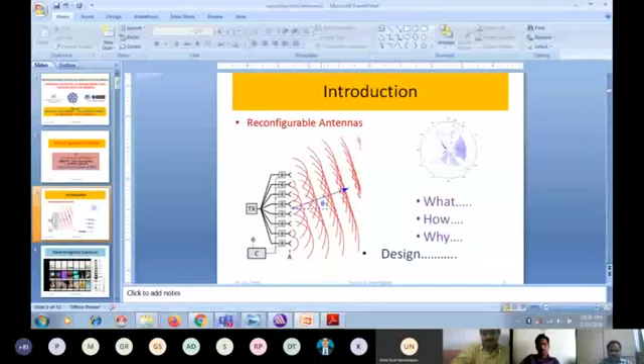Right? Let me start with the design of reconfigurable antennas. First of all, let me start with the electromagnetic spectrum. I'll take a few minutes on the basics so that it will be useful and we'll go in a different point of view. Now, as we know, the EM spectrum is the range of frequencies or spectrum of electromagnetic radiation along with their respective wavelengths.

Now here, to prevent the interference between the different users, the generation and transmission of radio waves is strictly regulated by national laws and coordinated by the international body, that is the International Telecommunication Union (ITU).

They have been assigning different frequencies for different vertical services. Nearly 40 radio services are defined by the ITU. In some cases, the spectrum is sold or licensed to operators of private radio operators, cell phones, broadcast televisions, etc. Because it is a fixed resource in demand by an increasing number of users, the spectrum became so congested and needs to be utilized more effectively.

That is what we deal with in the new technologies as well as in driving modern telecommunications. So innovations such as spectrum management, frequency pooling, and of course cognitive radio are the new technologies being utilized to use the electromagnetic spectrum very effectively. So we should effectively make use of the spectrum.

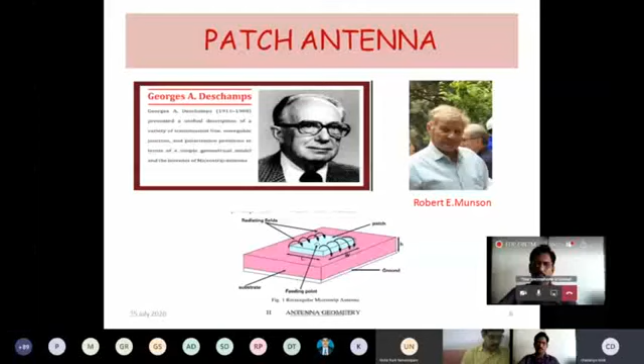Now, for Wi-Fi, the data rate may be up to 54 Mbps, and the distance covered by Wi-Fi is only up to 30 meters. Similarly, we have Zigbee, which works only up to lesser distances. Even Bluetooth works only up to 10 meters, with a data rate of only up to 1 Mbps. So these different wireless standards work with different data rates, ranges, and bandwidths.

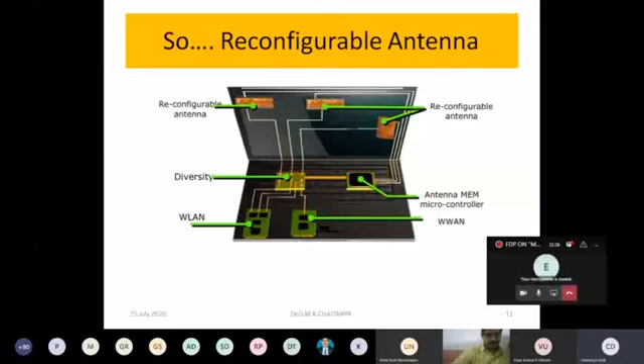Therefore, in order to support these different technologies and increase the functionality, we need a single antenna, that is a reconfigurable antenna. Now, what is meant by a reconfigurable antenna?

A reconfigurable antenna has the ability to radiate more than one pattern at different frequencies and polarizations. It can provide diversity features of operating resonant frequency, polarization, as well as radiation pattern, without changing the physical structure. How can we achieve this reconfigurability? Only by changing the current distribution over the structure.

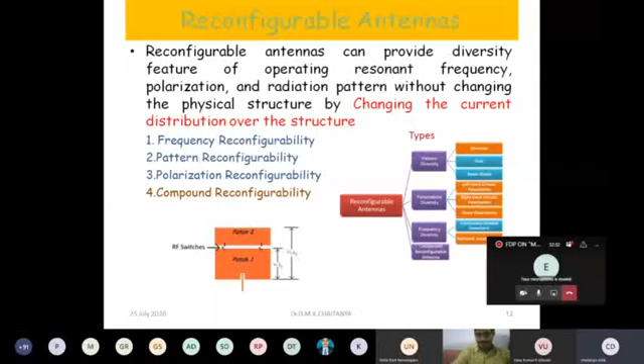Now, what are the different types of reconfigurable antennas that we have? We have different types of reconfigurability: frequency reconfigurability, pattern reconfigurability, and polarization reconfigurability.

Of course, the combination of these three is termed compound reconfigurability. Now what we are going to do is, we are not changing the vertical physical structure. By using some different switching techniques, or different types of vertical techniques, we are going to achieve reconfigurability here.

Now you can see here, suppose the antenna is working at different frequencies, so I just can use only one antenna rather than using different antennas for different frequencies. Similarly, using these antennas, I'll have only one antenna to radiate differently, or in different directions. Similarly, the polarization reconfigurability, whether I need circular or linear polarization.

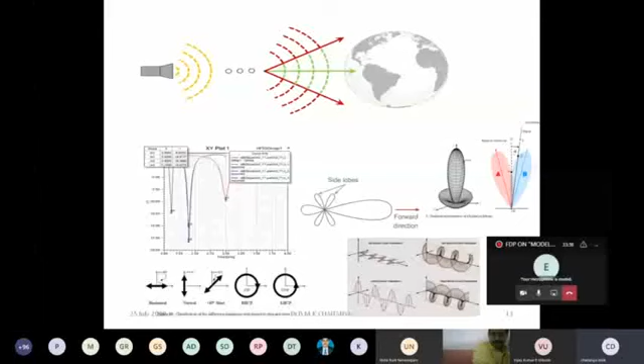Now, why these vertical reconfigurable antennas? This reconfigurable antenna can reduce the size, the volume, as well as the cost of the vertical system. Similarly, they support multifunctionality, and require a lower end front-end processing, which reduces the interference. That is very important.

Even yesterday the experts gave the MIMO techniques and everything, which reduces the interference, which is useful for adaptive environments like cognitive radio, etc.

Now, how to achieve the reconfigurability? It can be achieved by many ways: either by using electrical switching, or optical switching, or by changing the physical orientation of the antenna, or by material change.

Now what I am going to do is, this is a fixed antenna structure. I am not going to change the structure, I am designing the structure like that. So I may use an electrical switch or optical switch, so that depending on the switching characteristics, the antenna length will vary. In turn the current distribution will vary, therefore the antenna will radiate differently with different resonant frequencies.

So here, either I may use the vertical switching technique like electrical switching or optical switching, or physically change it. I may use a rotor or stepper motor here, so that I can change the orientation, and therefore also achieve reconfigurability. Similarly, by using different material changes.

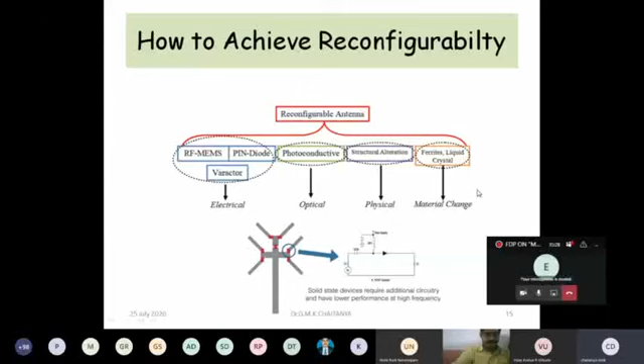So all the design and everything we will see here. Now, what are all the design considerations of the reconfigurable antenna? First of all, the first one is the frequency, similarly the radiation pattern as well as the polarization.

Now I just want to tell a small thing for young researchers here. The first most important factor to be considered for research is the frequency — where it should be used, either for narrow band or wide band. Then we have to take these frequencies as per the guidelines of ITU, because most people select frequencies as they require or something.

So it should be as per the ITU vertical regulations. Suppose you want to develop applications pertaining to industrial, scientific and medical use, you have to select the ISM band applications at 2.45 gigahertz or something. Better we go for UWB because it is open for all, that is 3.1 to 10.6 gigahertz.

Similarly, the application — what for we are using these antennas. Is it for mobile applications or fixed applications or platforms? And what is the volume area available to place the antenna, and the bandwidth consideration.

Similarly, the radiation pattern, and in what direction I should transmit the signal, and what beam width I require. Similarly, whether it is for long distance communication or short distance communication — what beam width I require.

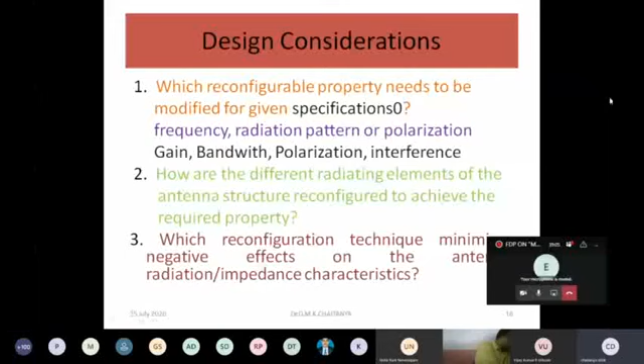So we have to carefully design in order to place these switching elements inside the antenna. The general switching elements we may come across in the design of reconfigurable antennas include RF MEMS, which uses mechanical movement in turn changed by electrostatic, magnetostatic, or piezoelectric effects. Switching means always on and off, so how do we achieve the on and off condition? RF MEMS can be switched by using electrostatic, magnetostatic, or piezoelectric effects.

Similarly, pin diodes, in the forward biased condition, are in the on condition, and in the reverse biased condition they are in the off condition. Varactor diodes are similar to the PN junction diode, with a variable capacitance achieved through biasing. By applying a suitable biasing voltage, we change the capacitance, which switches them on or off. Similarly, photoconductive elements like lasers and LEDs can be brought into the off or on condition, achieved by using external lighting from laser diodes.

Whatever switching element we use inside the antenna, we can switch it on and off so that we may increase or decrease the length of the antenna.

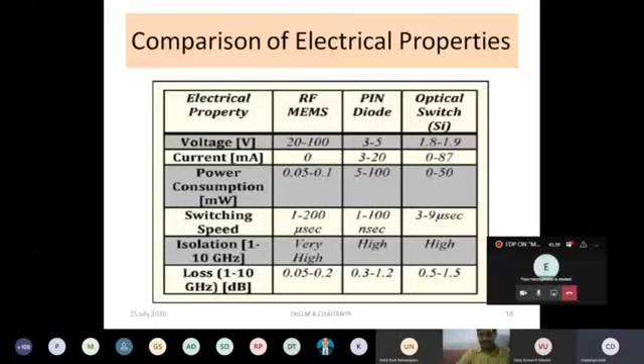But we have to select the switching elements as per our design requirements only.

Now what are the design challenges when designing a reconfigurable antenna? First, the biasing circuitry - if the biasing circuit or biasing network is complex, it makes the antenna complex. We use biasing circuitry in order to run these switches, to make them turn on and off. This is given by the vendors, or we may select from anywhere. This is very important because it increases the complexity of the antenna. Similarly, increased power consumption will increase the system cost. There is also the generation of intermodulation products, which may result in increased interference. Similarly, switching speed is important to ensure the proper functionality of the antenna.

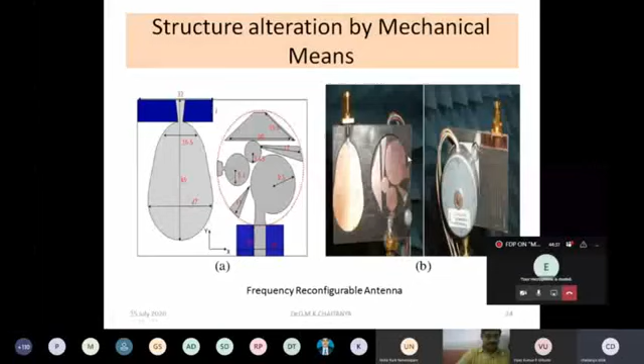Behind this structure, they have placed one stepper motor. Now what happens is whenever the stepper motor rotates, the orientation of these antenna elements changes so that it resonates at different frequencies.

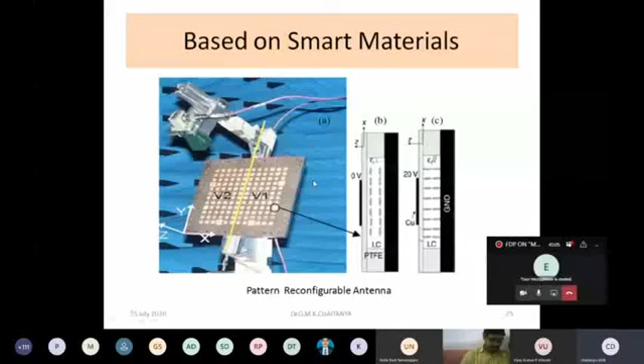Similarly, based on smart materials. Here also in this design, physically we are not changing the materials. By applying suitable biasing voltages to liquid crystals or ferrite devices, we are going to change the material properties. In turn, we are going to achieve the reconfigurability.

Now, scope for the research. Extending the designs of reconfigurable antennas, engineers can look into aspects like frequency of operation for different upcoming applications, maybe millimetric waves up to 200 to 300 gigahertz. Similarly, effective utilization of the spectrum by increasing the frequency of operation, while keeping the transmitted power levels within the safer zones, bandwidth and gain, polarization effectiveness, which in turn increases the speed of operation with increased data rates.

Similarly, the coverage area. For example, if we are designing 5G antenna transmitters, what is the coverage area? Up to what area can I cover? All these are very, very important. Similarly, interference mitigation techniques by using MIMO. MIMO is the best concept for interference mitigation.

Similarly, attenuation of the signals. Everyone experiences attenuation of the signals during heavy rain. You may not get your signals in your TVs during the rains. All these are different research areas where you can work. Usage in IoT platforms, by using virtual antennas, maybe in malls, where we may have different gadgets and devices. So people may work on these things.

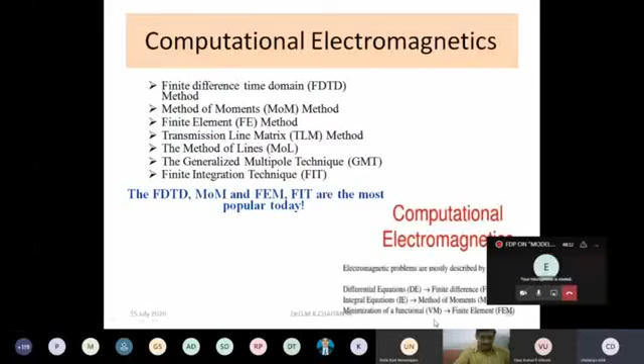Suppose we are using the FDTD method; it solves Maxwell's equations in differential form. Similarly, when we solve the integral form of the equations, the method of moments is implemented. Similarly, the FEM technique basically uses energy minimization as a function. Of course, they have their own advantages and disadvantages.

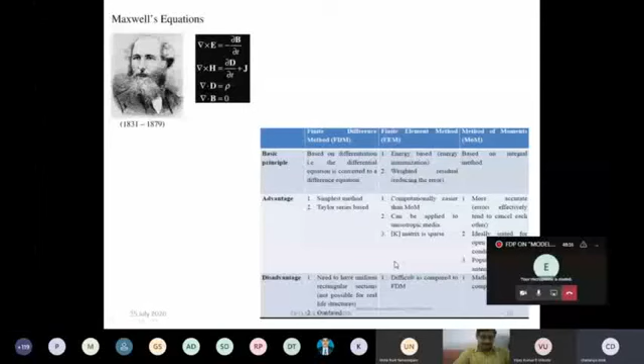Now, I'll give a small point on how the finite element method works, because HFSS is based on the finite element method. The finite element method basically solves the design in four steps. First is the discretization of the antenna elements into a number of subregions. Then deriving the equations of a particular element, assembling all these elements, and solving the equations obtained. ANSYS HFSS is based on this finite element numerical technique.

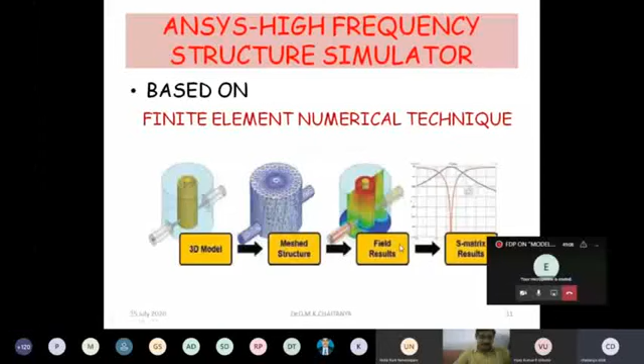It converts the structure into tetrahedral meshes and calculates the results based on the energy functions. Now, what are all the six steps that we have?

Basic design steps that everyone should remember: first of all, we have to create the model, then we have to assign the boundaries, then go for the excitation, then we have to set the analysis setup, then we have to analyze and solve, and after that we have to get the results.

Now I just want to show you one small design of a compound reconfigurable antenna using ANSYS HFSS. Here I'm using only HFSS version 15. Of course, you have the latest version 19, which is sophisticated with different solvers and different kinds of applications, but we are not permitted to use it. Here I am using only 15. So let me start with this particular design. Before going to this design, I just want to tell you two points.

Now, the dimensions of the antenna. Here you can see all the dimensions of the antenna. They are calculated using the normal patch design equations. Here we have to calculate the width as well as the length, which is L effective minus 2 delta L. Why minus 2 delta L? Because of the fringing effects, it may be extended by delta L in this direction. So we have to remove 2 delta L. Therefore we are calculating the length and width of the patch antenna.

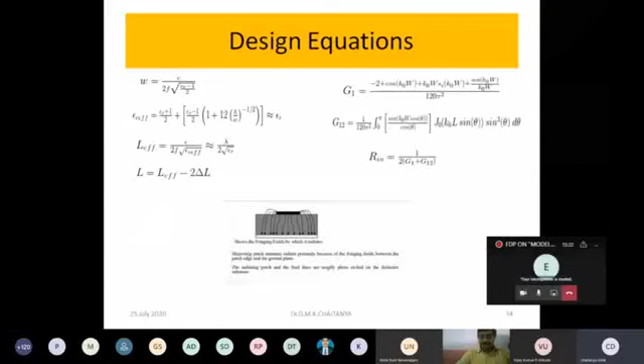So after that, I'm using an inset feed here. In order to design the inset feed, we have to calculate the impedance. After calculating the patch length, the feed line characteristics have to be calculated. So we have to find out the input impedance of the antenna. We have to calculate the edge impedance, because we have to properly interface the feed lines with the patch impedance. The current-voltage ratio changes as a cos square across the length, resulting in the impedance decreasing from the edge as a cosine function toward the center.

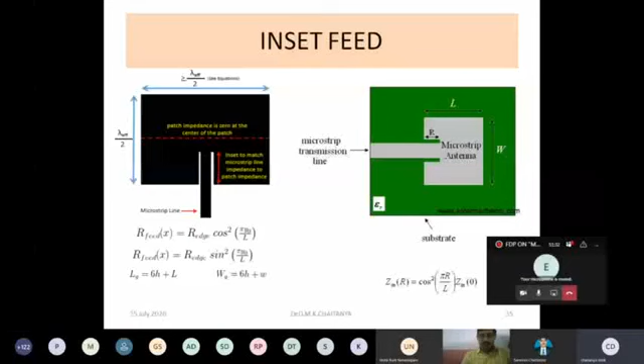So these are different feeding techniques. I'm not concentrating on the theory here. So this is an inset feed antenna. I'm designing these dimensions for 2.4 gigahertz, of course. Then I have optimized these to get the proper results. You have to keep that in mind. Now let me start with the design.

Sir, is it... I think it's visible now. Yes, yes, definitely. Yes, sir, now visible. Sorry participants for the small problem.

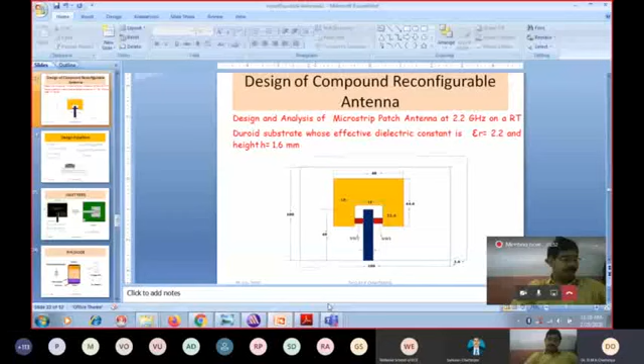Now I just want to show you. I want to design this compound reconfigurable antenna. It contains the patch antenna, which contains the substrate here. Then we have the microstrip patch. Then this is the feed. Now I am using two PIN diode elements here. We are going to see the compound reconfigurability. What is meant by compound reconfigurability? It gives frequency reconfigurability, pattern reconfigurability, as well as polarization reconfigurability. The antenna can achieve all these things. We just want to have a small demonstration here.

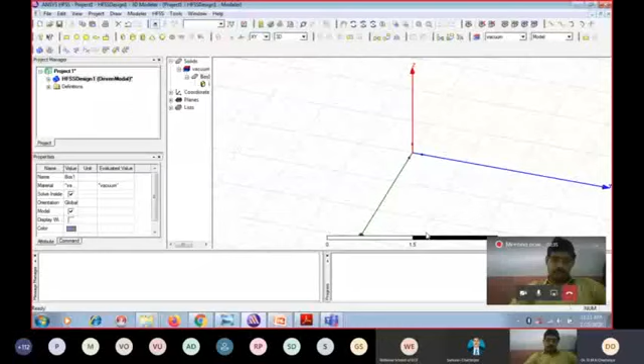Now we have to start with the substrate. I'm just drawing a substrate here. This is the position. I am taking it as minus 50, minus 50. Then the length here I am taking as 100, then this one 100, and the Z size is minus 1.6 here. Why have I taken this one? You have to press Control D here.

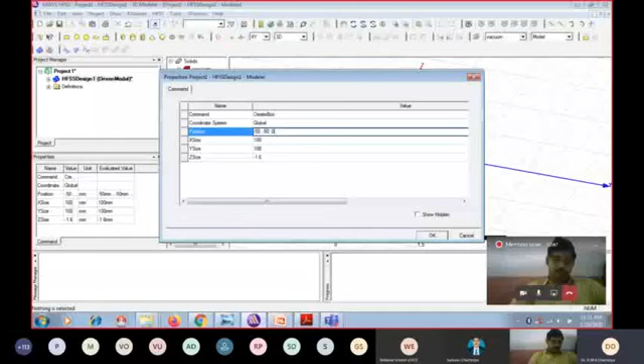Now, this is my ANSYS HFSS window. You can see we can create a project here and insert an HFSS design. Then immediately we get the project manager as well as a different window here. First of all, I'm designing this one. I'll give you a small introduction about this. Actually, it is designed with FEM. Before that, we have to go to the modeler. We have to change the units. The default units are already millimeters.

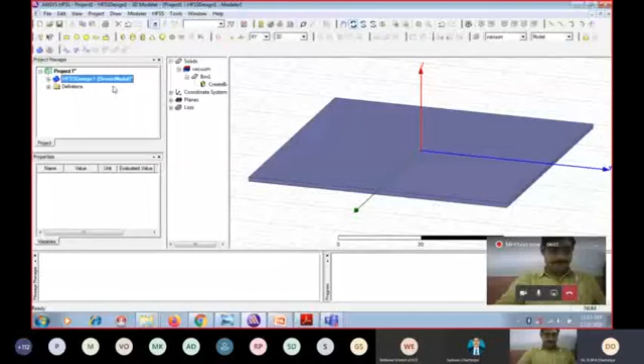Similarly, we have different modelers. You can go with the model or solution type. I'm going with driven modal; these are different concepts. We have different types of modeling techniques here. The modal is meant for TE or TM design, whereas for TEM, different waves, we have to use terminal.

Now I have designed the substrate here. Now I'm changing its name to substrate. For the material, as I've shown you, I'm using Rogers RT Duroid.

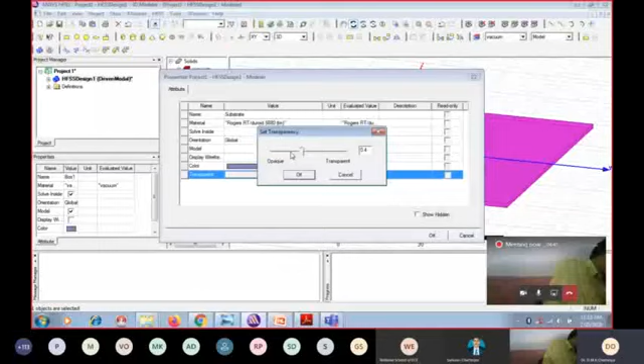You can see here 5880, whose relative permittivity is 2.2. This I am selecting here, then pressing enter. Now I am just making it a transparent color, whatever color I can use. So I am changing the color here. You can see here now. So this is our substrate. I have created the substrate.

Now, after the substrate, what we have to do is create the ground. There are 3 ways to design the ground. The simplest method that I am showing you is, you have to select this face by entering F, and after entering this one, I am just clicking it. Press F and click. Once again, I'll show you. Pressing F and selecting this one, you will get like this.

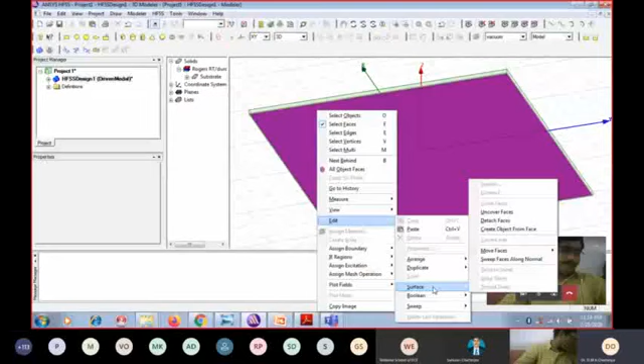Now what I am going to do is Edit, then Surface, then Create Object from Face. So we are creating the ground plane here, or otherwise we can draw a vertical rectangular shape also. But this is the simplest method. Now this region you can see is the substrate, of course, and here we have got the ground.

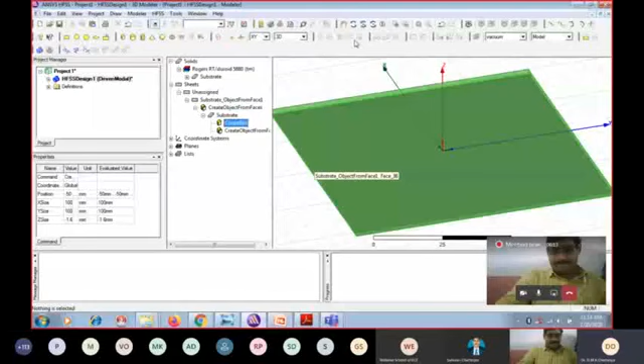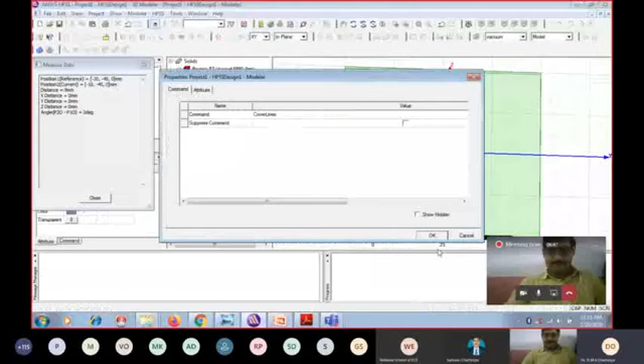So the first step is creating the substrate. The next step is creating the ground plane. Now we have to assign the boundaries; later we'll see it. Now I'll create the patch here. In order to create the patch, we have to select a rectangle. Now what are the dimensions of this rectangle? This is the patch.

So I am taking it from -20, -22.3 here, 40 here, 44.6. Now we have created the patch.

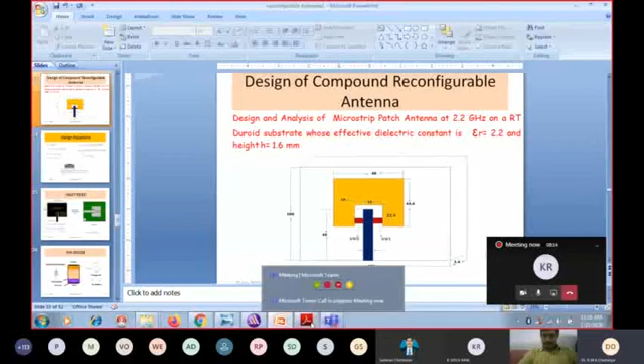Now our next step is we have to remove this place and attach these switches. So I am drawing one more rectangle here, rectangle 1. I am taking it as a rectangle as it is, because I'll be subtracting this one to create this slot. The dimensions of this one are -5, -22.3 here.

Now I have created one more rectangle on my patch. Then I have to subtract the rectangle from this patch, and it will be directly visible here. Subtract patch minus rectangle 1. Therefore you will get the antenna like this. Now we are half done. The next one is we have to create the feed.

I'm creating the feed here. I'm just changing its name. First of all, let me give the dimensions: -2, -10, 0. Then that is -40. That is the width here. We are giving this width and everything, of course.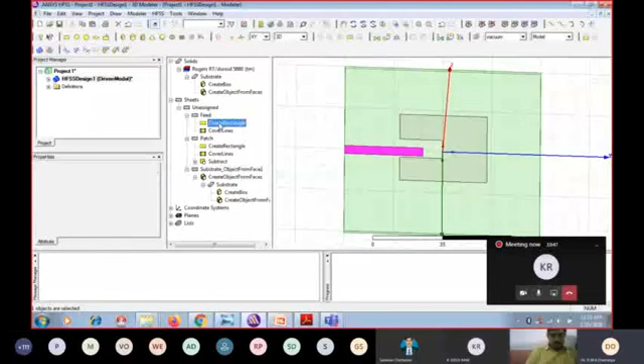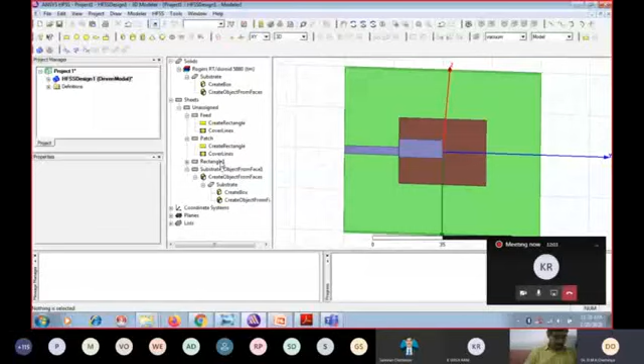One second, let me see. Okay, maybe some dimensions I might have given wrong here. Let me see. -20, 22.3, comma here. Okay, so the design concept I'll give here.

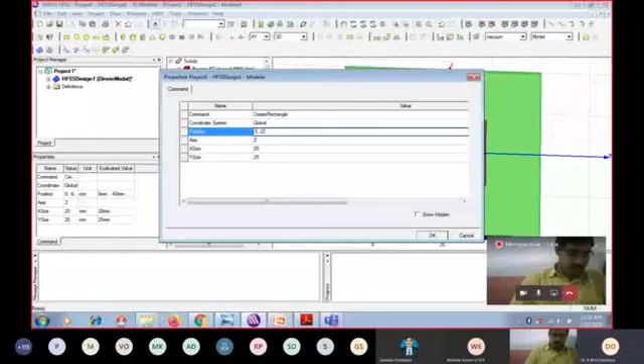So after one second. Okay, let me show the design here once again. I'll show the design here.

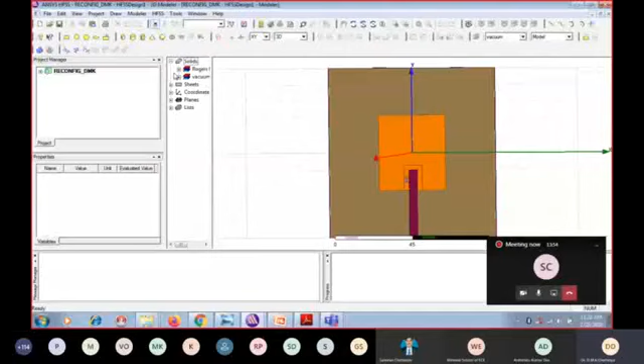Now what I'm going to do is Solids, this one; Rogers material I have given. For the substrate, I'm creating the box with -50, -50, 0 here. So the substrate I have taken like this. Then sheets: first, I'm taking the patch. So this is -20, 22.30.

So first of all I'm creating the patch here, then I'm creating the rectangle, you can see here. So here we can see this patch and this rectangle; if you subtract, you can see it like this. We are designing this one.

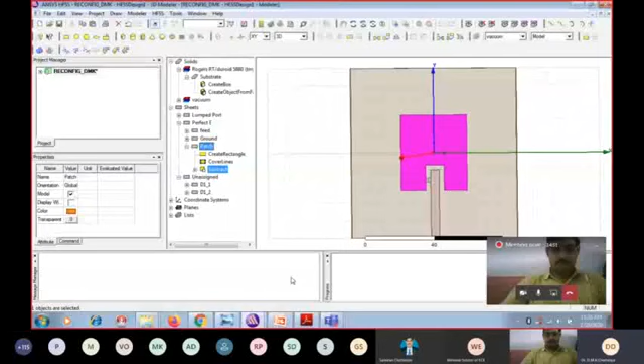The next immediate step is we have to create the switches. So how to create the switches? The PIN diode switch, as you can see from this one, consists of two combinations: an inductor as well as a parallel capacitance connected with the resistance, in order to make the switch on and off.

In the PIN diode off condition, we are going to take these values: 0.6 nanohenries, 0.35 picofarads for the capacitance, and 10 kilo ohms. In the on condition, only the inductance value and the resistance value will be there. We have to keep that in mind. So this one I am creating once again.

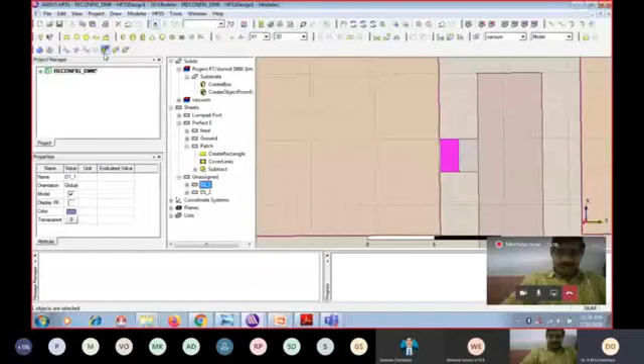Now you can see this D1, diode 1. Here also I'm doing the same. So how to create this one? Let me create a second rectangle. Suppose this is diode 1 here. One more diode here; this one is diode 2. Now the values of this one I am taking as 3, -15, 0.

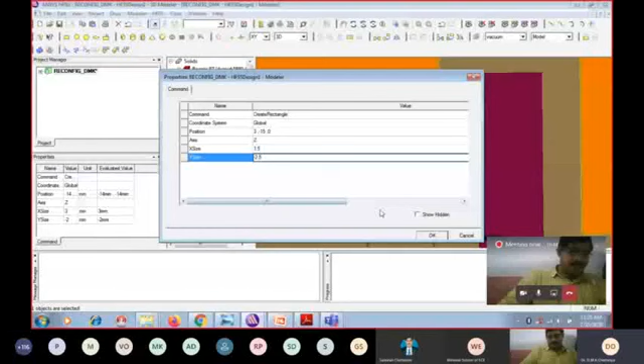You can see I have created one more rectangle here. So I am creating the PIN diode switch here. Similarly I am creating one more diode switch here. Now the dimensions of this one I am taking as... so I have created the switching elements.

So overall, first of all we have created the substrate, then the patch antenna, and one more rectangle which I subtracted from the patch antenna, then I created the feed point, then I am creating these PIN diode elements here. So this is one PIN diode. Now we have to make these diodes on and off.

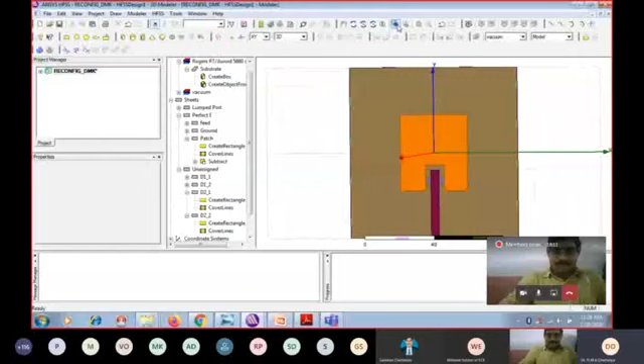For that we have to give the lumped RLC. I'll show you how to assign the lumped RLC. Now right click or select this one. I want to make it an off condition. Keep in mind what the off condition is: a combination of inductance 0.6 nanohenries, capacitance 0.35 picofarads, and 10 kilo ohms.

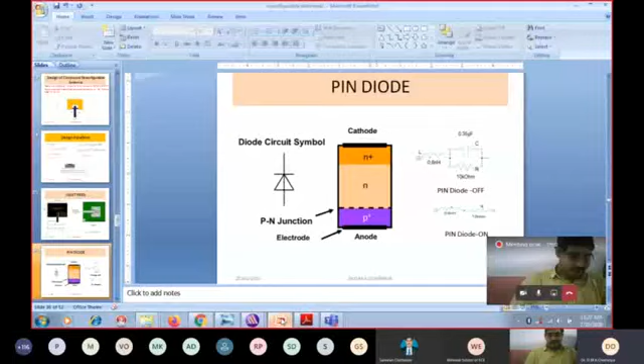Now assign boundary and lumped RLC. We have to click on the lumped RLC. What values are we giving here? Suppose I want to make the diode off condition. First is inductance, 0.6 nanohenries. And I have to define the line: the current feeding from this one will be coming in this direction, so I have taken this direction.

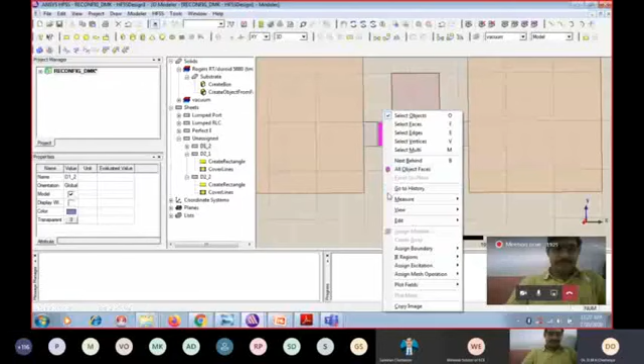Similarly, for these diodes, once again I am going to assign the lumped RLC here. It is a combination of capacitance and resistance. The capacitance value is 0.35 picofarads in off condition, and the resistance value is 10 kilo ohms. In off condition it is generally reverse biased, so 10 kilo ohms. So I am defining the line here, from this direction.

So similarly, this is the off condition. Once again, I am going to do the same thing: assign boundary, lumped RLC. For the first one, I am taking a resistance value of 10 kilo ohms and a capacitance value of 0.35 picofarads, and defining the line.

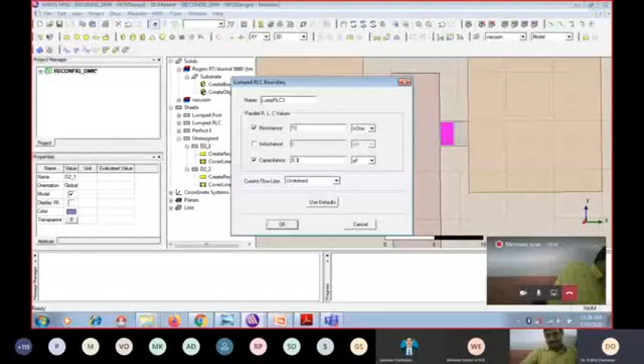Similarly, this is okay, and I am selecting this one, lumped RLC once again. For this one we have only the inductance value, 0.6 nanohenries. Right. So what we have done is press Ctrl D to achieve this one.

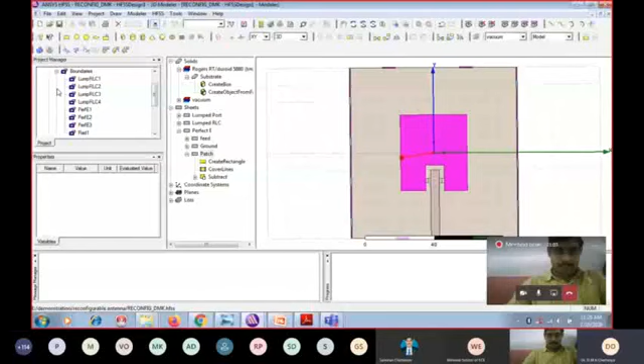Now here, first we have to create the model. I have created the model. Then immediately we have to give the boundaries. You can see here, this is already done. Okay, I'm removing this one. We have to give the boundaries. Right, I'm selecting this one. You have to assign the boundaries perfectly here.

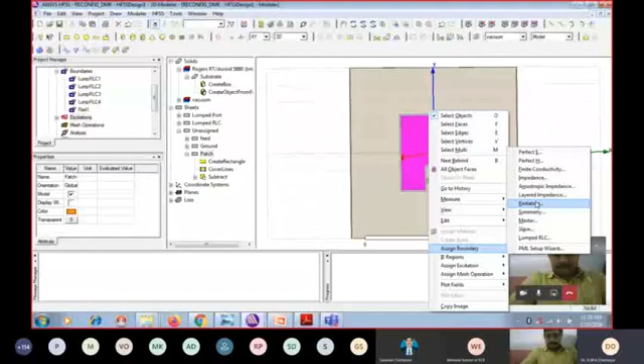So this is perfect E1. So that is boundary assignment, the next step I have given you. Similarly, you have a ground here, and we also have a ground on the backside. We have to take the ground. So here I am assigning it as perfect E boundary. This one I am also assigning the boundary. So I have assigned the boundaries.

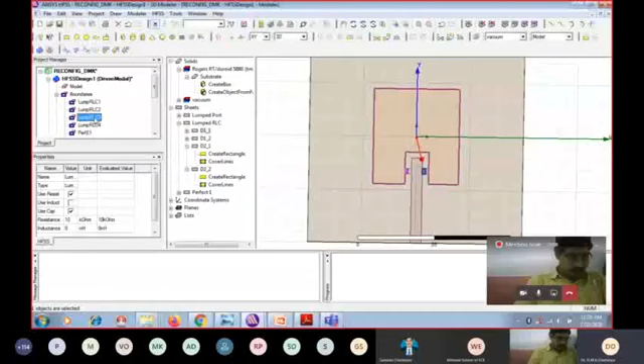Now, this is your lumped RLC, you can see here: RLC2, RLC3 and RLC4. In HFSS version 15, we don't have the option to create the automatic open region, so I have to manually draw the open region here. I have to create the radiation boundary. So I have to draw the box.

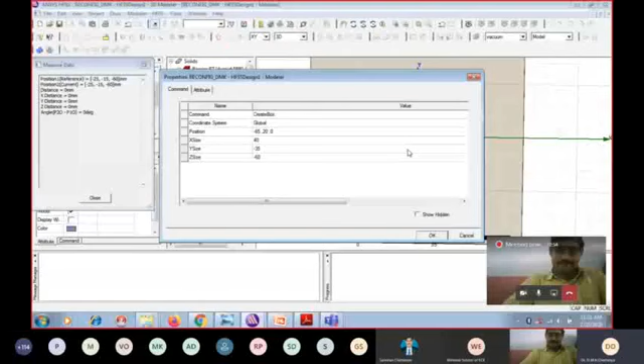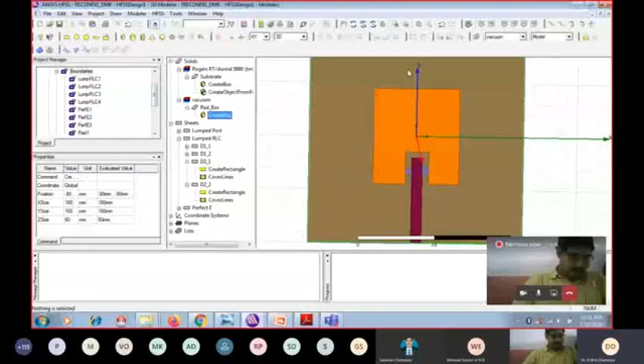Actually, in version 19 and above, you can right click and you will have an option called create open region, but here we do not have create open region. So I am creating a region. The radiation box is already created here, and you can see the dimensions I have created. This is our entire region.

The next immediate step is the analysis, so we have to give the excitations. We have to create the excitation here. Let me close this radiation box. I am going to the YZ plane, and I am creating a lumped port here. So here I have created a port, and I have given the excitation as a lumped port.

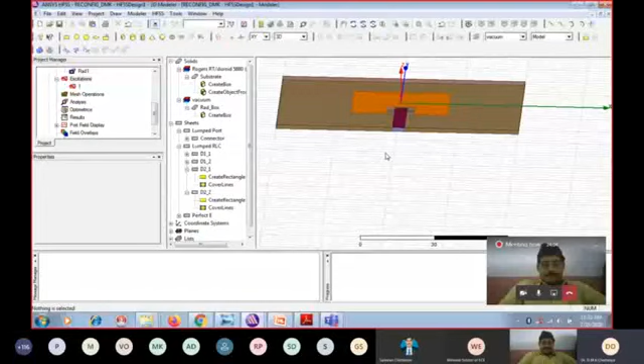Now what is this port? I have already created it here. This is the lumped port, you can see it. Otherwise I will show you once again how to create this one. We create excitation, lumped port, integration line. I have to take it in this direction. So I have defined the lumped port.

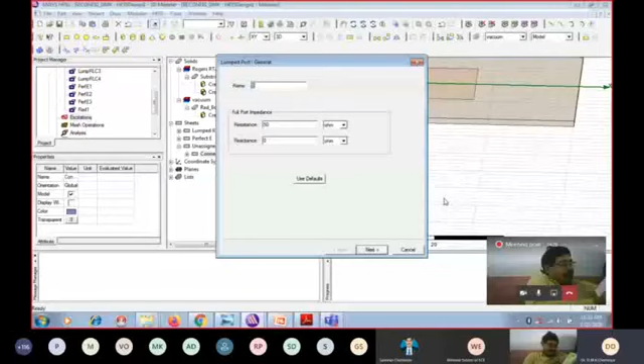So first, boundaries we have created, excitation we have created, and similarly we have to give the analysis setup. This is the next step to follow: add solution setup. The solution frequency I'm designing for is 2.4 gigahertz. This is very important: maximum number of passes I am taking as 25. By default it shows 6.

What is the significance? I'll show when the results are there. The structure creates a mesh like grids, a tetrahedral pattern. If you give 6 or so, the solution will not converge perfectly, so we will not get accurate results. Therefore I am taking the maximum number of passes as 25 for this case. Now this I have selected here.

Then after this, what we are going to do is give the frequency sweep. Now there are different kinds of sweeps here: discrete, fast, and interpolating. This fast and others are meant for fixed frequencies. If you want discrete, it will discretize for fixed frequencies, so I am using discrete.

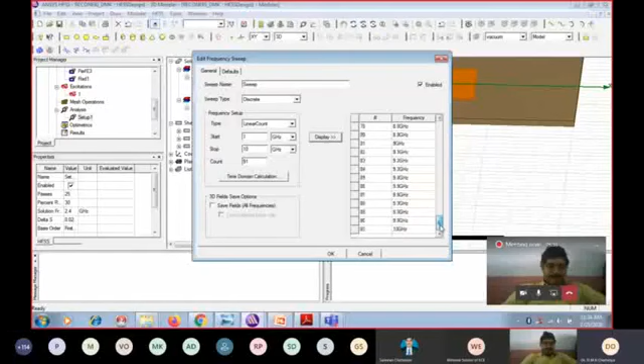Now I am taking it as a linear count. So what we are going to do is see all the frequencies that you are working with, all the frequencies I have selected. Then if you want to plot, save the fields. This is actually useful whenever you are going to draw the gain versus frequency, you have to save the fields. Remember that. I am clicking OK here.

Now I have given the setup also here. So first we created the model, adding the boundaries, then I created the excitation, then analysis. If you click here, everything is coming here. Then I have to analyze it. Now I've already taken the ready-made values because I've already analyzed it, since it takes some time.

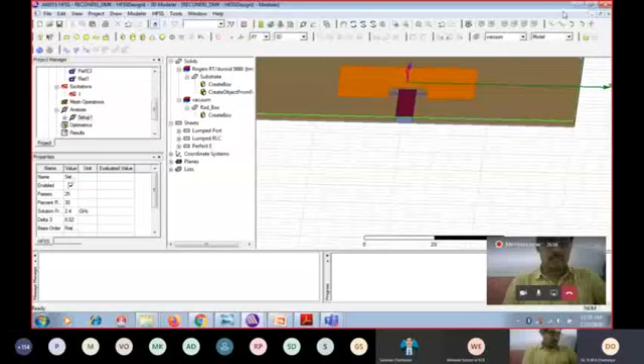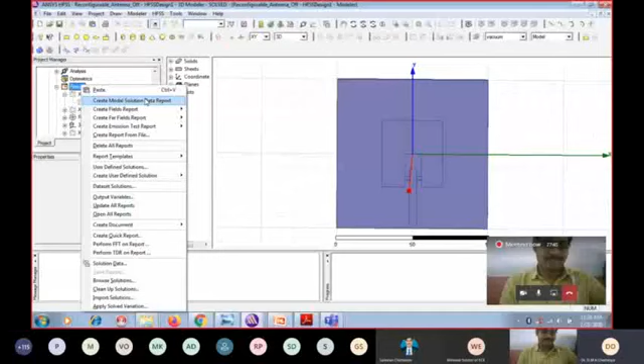Now first case, I'll be dealing with the reconfigurable antenna for the off conditions. You can see the results here. Whenever both switches, switch 1 and switch 2, are in off condition, this is antenna off. You can see the antenna. I can create the results here: create model solution, data report, rectangular plot, and plot S parameters, new report. This antenna, when both switches are in off condition, is working at 5.6 gigahertz.

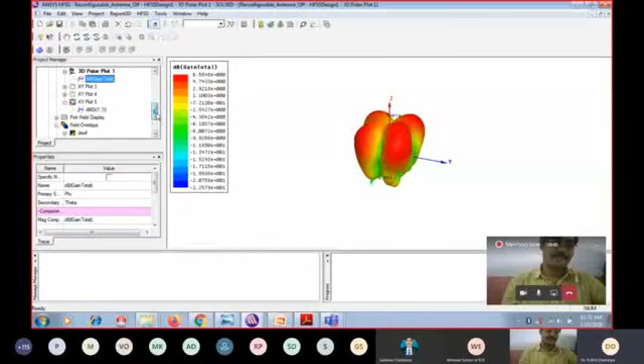Now you can see the field overlays. I'm showing you the surface current density. If you want to show the surface current density, you can see here. I'm showing here. You can see the antenna is resonating linearly here. The polarization is linear in this case. You can observe the plot here. This is the surface current density, just remember.

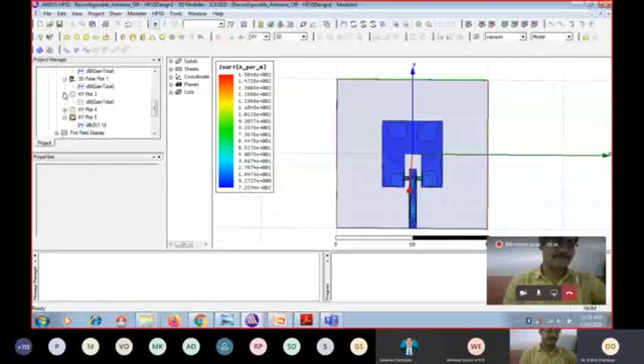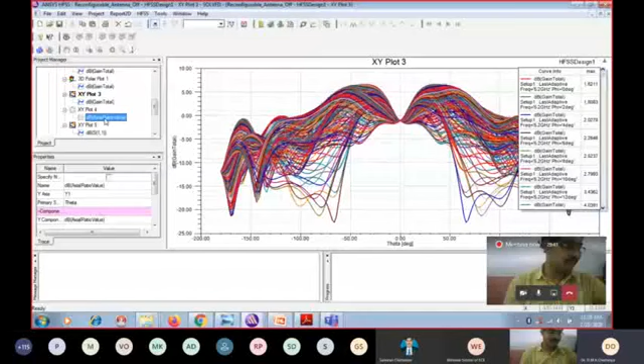So the antenna is resonating at 5.2 gigahertz, giving some radiation patterns, and of course the gain values we can see. This is your radiation, but axial ratio we cannot get exact values because it is linearly polarized. Now this is the off condition.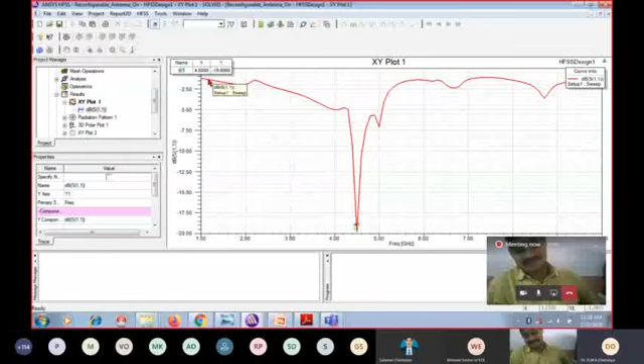Now what I'm going to do is, if I take both antennas in on condition. I've already taken the results to save time. The antenna is resonating at 4.5 gigahertz. And the radiation pattern is like this. The 3D polar plot, the 3D gain plot, you can observe here.

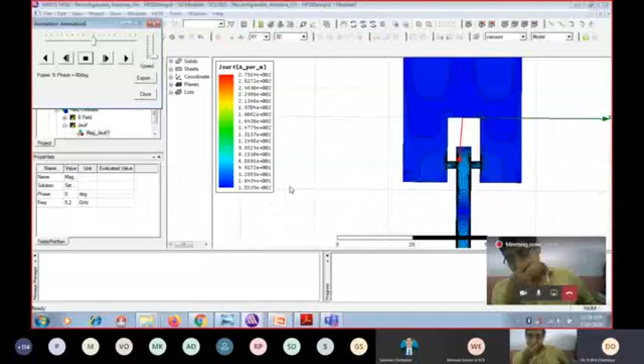Now this is also current density, I just want to tell you once again, I'll show you the current density here. In this case also it is linear polarization, you can see the current distribution is linear. So whenever the antenna is in off condition, it resonates at 5.6 gigahertz, whereas in on condition it comes to 4.5 gigahertz, and the current distribution is linear here.

Now similarly, another two cases we will see here, that is switch one on. What I am going to do is make only this switch on. What is happening, let us see. This is the switch on.

You just can see the antenna is resonating. What is the frequency it is resonating? It is resonating at 2.4 gigahertz, as well as 3.1 gigahertz. Whenever the antenna switch one is in on condition, it is resonating at these two frequencies. Similarly, the radiation pattern also will be getting changed.

Now this is different. We'll show it here. This is different compared to the first results. I'll show you in the PPT all these results. Now what is the radiation vertical current density? You just can see here.

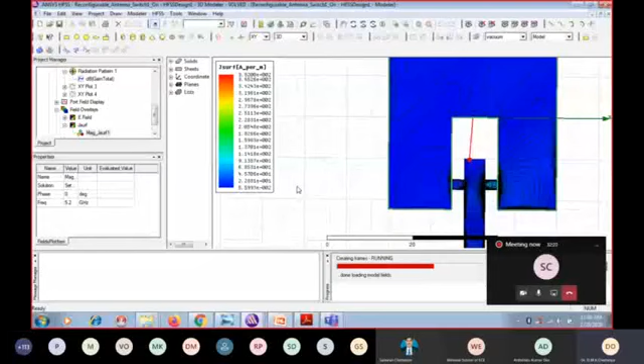Similarly, whenever switch one is off and switch 2 is on condition, the antenna is resonating at different frequencies, resonating at 2.5 gigahertz and 3.2 gigahertz. Similarly, the gain plots you just can see here.

Now this is a gain plot. The radiation patterns you just can observe. This is a different radiation pattern. Now current density you just can see here.

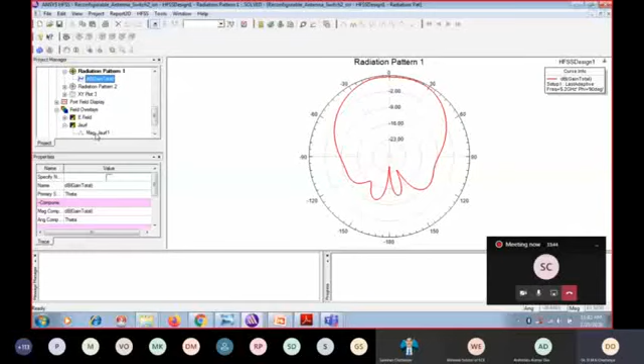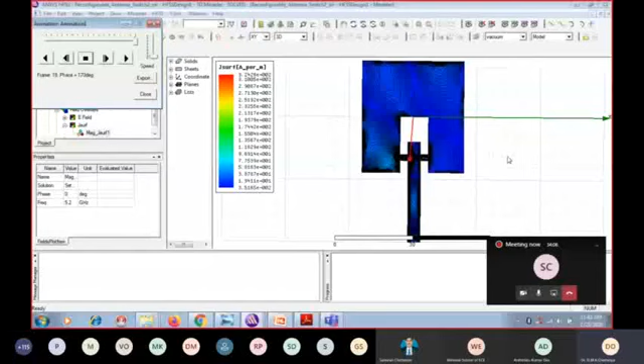So when both these switches are in off condition, the antenna is resonating at 5.6 gigahertz, and the return loss value is minus 21, and the peak gain of 6.27 dB for the case of both off conditions. I think you just can see here. The gain value you just can see from here.

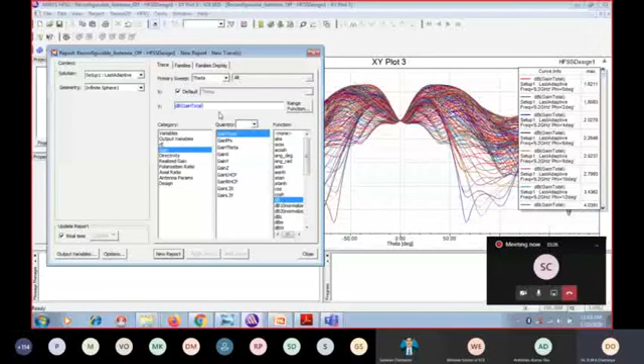You just can see here, what is the maximum value and everything, add a trace characteristics. I am taking the maximum values. We will have the different gain values here. Similarly, the polarization that I am showing you is a linear value.

For these applications, as I told you, it is working for mobile devices as well as radar applications. Whenever only switch 1 is in on condition, the antenna is resonating at 2.4 gigahertz as well as 3.1 gigahertz. Similarly, it is working with RHCP, right hand circular polarization, and these are the return loss values, and the peak gain value also getting changed. Therefore the application is meant for Bluetooth and wireless LAN.

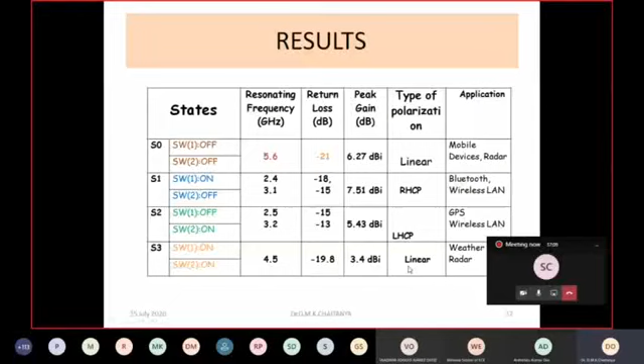Similarly, switch 1 off and switch 2 on, now it is working at two different frequencies, peak gain of 5.43, that is the gain value has got changed. Similarly, you have got an LHCP operation. Now for both the switches in on condition, the antenna is resonating at 4.5 gigahertz, and the polarization we have seen is linear operation. Now these applications are meant for weather and radar.

So that is what we have seen, all these results you just can see here. This is your gain plot and everything. Switch 1 and switch 2 both are off condition. Now switch 1 on and off condition, just now I've shown you the results. All these results are placed here for understanding purpose. This is the radiation pattern, 3D gain value, and this is switch 1 off or switch 2 on condition, it is resonating at 2.5 and 3.2, and the current distribution I've shown you there.

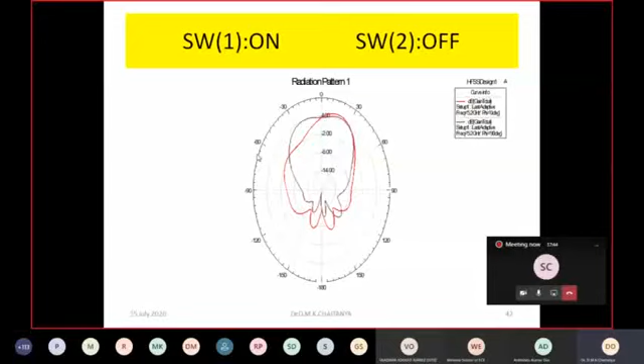So you just can see the radiation patterns, you can see it is tilted in this direction, whereas here it is tilted in this direction. Similarly, when both these switches are in on condition, it is resonating at 4.5 gigahertz, so the radiation pattern gets changed. So therefore the designed antenna can be able to give frequency reconfigurability, because they are resonating at different frequencies. Similarly, it is giving you pattern reconfigurability, because you just can see it is giving you different patterns, you just can observe here.

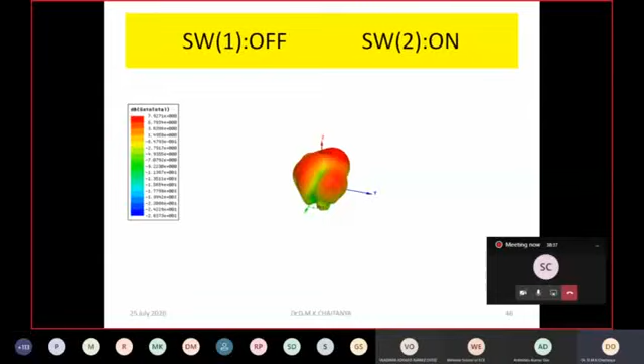So pattern reconfigurability, similarly the polarization reconfigurability that I have shown in the surface current distribution and everything. So the designed antenna can give all these reconfigurabilities of frequency, pattern as well as polarization. Hence I can say it is a compound reconfigurable antenna.

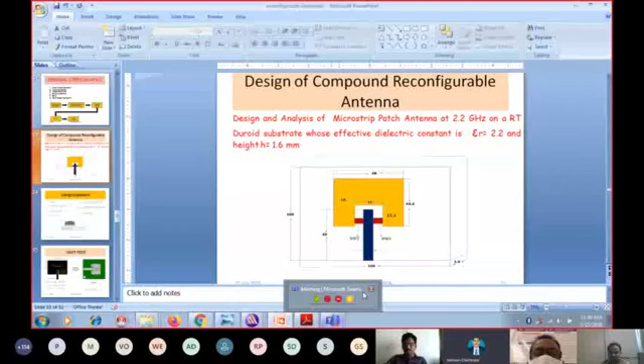Hello, just now who asked the question? What is your name? Sir, this is Manish. Manish here. But you are registered in Webinar School of ECE, how will you find out your attendance? No, I registered as Manish Sharma. No, you are registered, but whenever in Microsoft Teams app, it is showing as Webinar School of ECE. So we are unable to find your attendance, we are unable to identify who is Webinar School of ECE. Please ping our coordinator and tell them your correct name. Sure sir, thank you sir. Thank you so much, you tell your full name, you send me a message.

Any other participants, please, any other questions? Sir, I have one doubt. How will we decide the values of inductors, capacitors and resistors for getting the switches, like what we did in the PPT or presentation?

So first of all, while selecting the switches, we should select the frequency of operation. Suppose I am working for 6 gigahertz or 5 gigahertz, the pin diodes are different actually. So first the specification is the frequency, and that we have to select from the vendor, maybe DigiKey or something. There they will be giving you the on and off values in the data sheet. The manufacturer only will decide that. So majorly we have to select for the frequency of operation. The switch what I have used for 6 gigahertz may not be useful for 10 gigahertz. So these on and off values, specifications, are given by the vendors in the data sheet. So that's how we have to select.

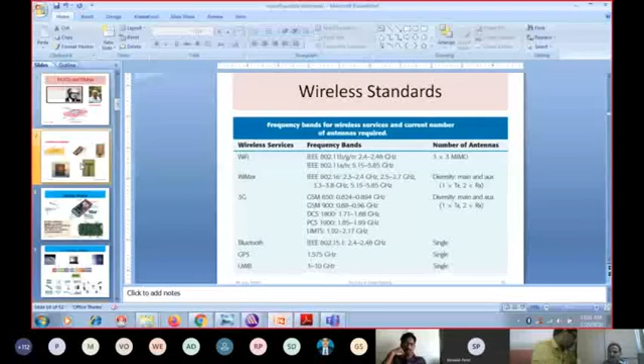The electromagnetic spectrum is given as per the recommendations of ITU only. All the frequencies and their allocation, whatever standards are given, you can see here, all these standards are given by the ITU, so we cannot decide on our own. These are IEEE standards, but the spectrum, the frequencies that you can use, are all approved by ITU only. I cannot use my own frequencies, because I may design my own antenna meant for defense application or some different application. So in order to avoid interference and for secrecy, we will not be allowed to use any frequency; we will be allocated certain frequencies only, purely controlled by the international regulatory body, ITU. That's all.

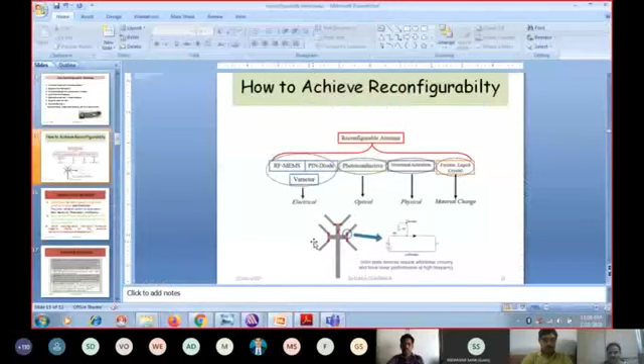See, whenever we are doing the biasing lines and everything, it will affect the performance of the antenna also. So here what we are using is the lumped RLCs. That's what I told you. So you can see here the lumped RLC I have given. Now whenever you are going for these types of things, it will definitely affect the performance of the antenna.

Okay, sir. Thank you. Hello, sir.

Yes. Sir, for MIMO antennas, reduction of mutual coupling is a big, important part. There are different types of techniques for reduction of mutual coupling. How will we assess it? If we are taking a rectangular patch, sometimes we take the neutralization line technique or parasitic elements. How can we choose those? Is there any theoretical part for that?

The theoretical part: MIMO antennas, that is multiple input and multiple output antennas, are majorly useful for the reduction of interference. Now the technique is, in that particular antenna, suppose one section is radiating in a particular direction; the radiation pattern is different, which means we are isolating the radiation pattern in the other direction. So the directivity of the antennas is different for the multiple inputs and multiple outputs. Therefore, in the same antenna we are getting the reduction in interference by the application of the excitations only.